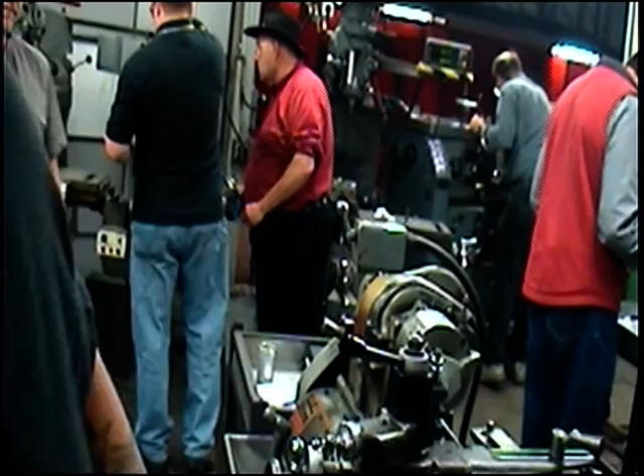This is where I'm at right now. And if you can see, this is the chuck. It's sticking out right here.

This is for safety reasons, because if it's not sticking out past the end of this chuck, and you go in and you're cutting and you hit one of these, it's called crashing the machine. You'll break this whole piece and everything.

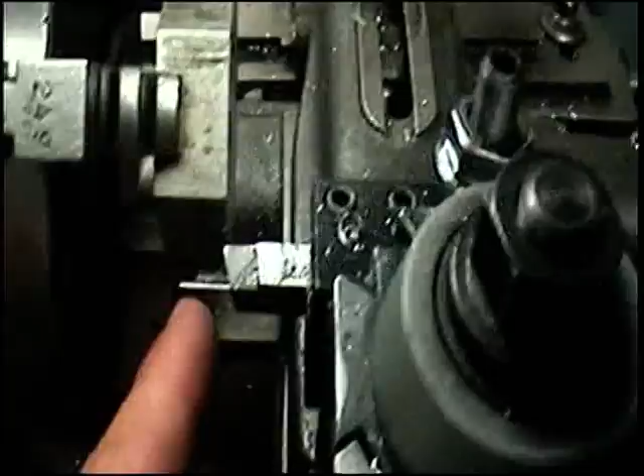So you want this sticking out, so when you're cutting, no matter what you do, you only cut the material. You don't cut into the headstock or the chuck or your bit, and all that breaks, and you got problems.

You have metal flying everywhere. You could probably die or something. You'll get hurt real bad.

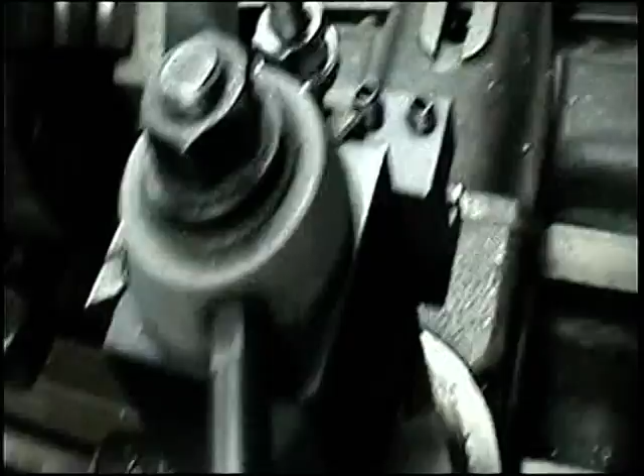So I'm taking off - you see it cleaned it up more. I still got these marks now. I gotta get it all nice, get rid of all this stuff. So I'm gonna go 15, 15, 15 thousandths until it's all like a mirror shine.

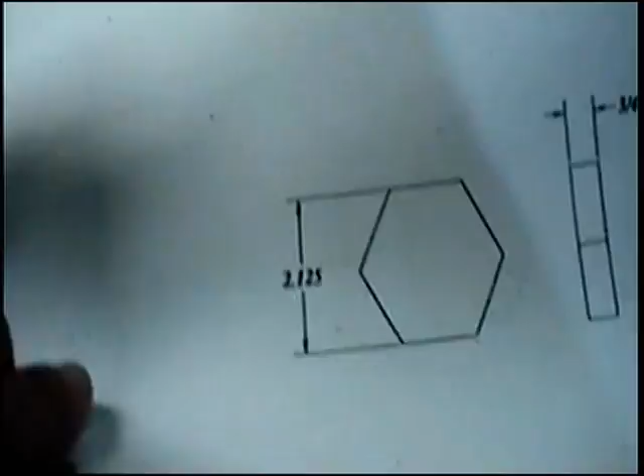And I just got this handout today, I didn't have it earlier. So the first 3 operations: you get your blank piece, file chamfer all 12 edges, the hex part blank, which I did.

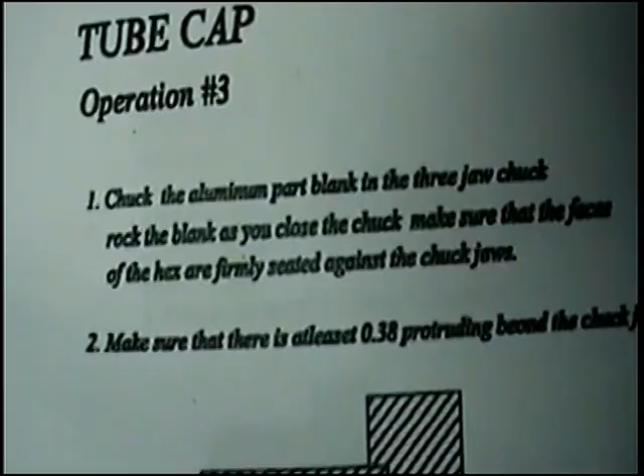I cleaned those up, and chuck the aluminum piece, part blank, in the 3 jaw chuck, blah blah blah - you want it protruding beyond the thing. That's the safety part. And this is where I'm at right now.

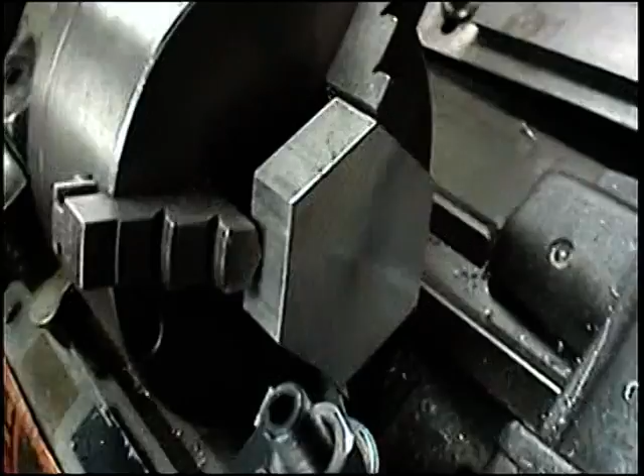So right here, okay, so when you're cutting, you never want to come back when you're trying to clear up this whole face. You never come past the center, because you can knock your piece out of the chuck.

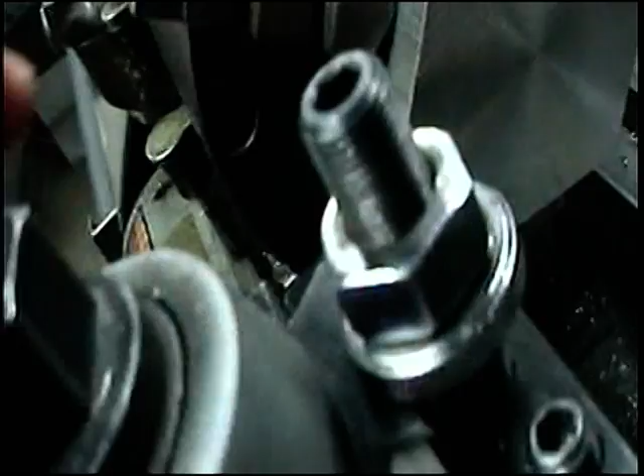And then if you want to know whether your piece is too high or too low - if there's a little tit, like you can feel a lump, then it's too low. The opposite means it's too high. So basically, I can feel like a little nipple right there.

So we already raised it up here, locked it down, and then when you're doing all this stuff, you want to use your brush to make sure all the filings and shavings from the last cut aren't in there, because that can adversely affect where it sits when you set it.

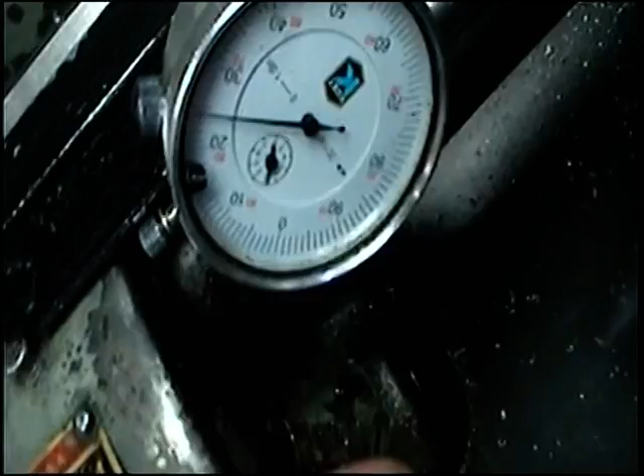So I'm just going to keep coming in 15 thousandths - 23 is my zero right now. I can set the dial at 0 if I want, but basically all you got to do is remember where you're at when you stop and turn off the machine, then come in another 15 thousandths and so on until it's where you want it.

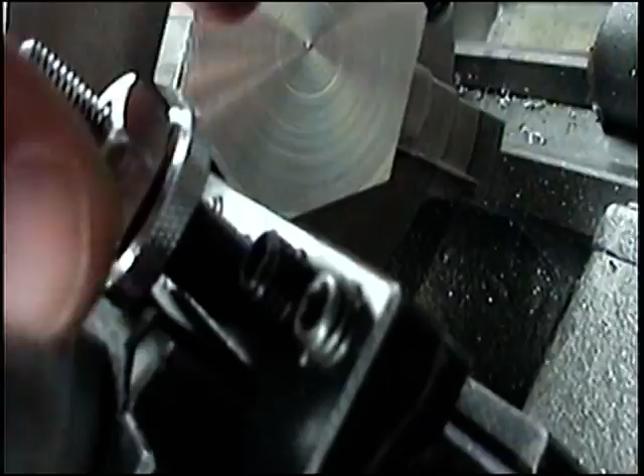Okay, I got rid of all the hack marks, but you can see I got this little tit right here, so my tool is still too low. So I raised it, loosened this, gave it a little turn, brings that up, walk it back down, and come across another time.

So I'm almost done here.

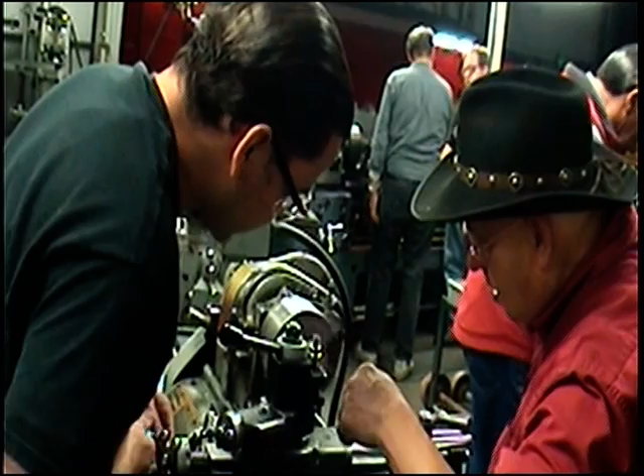So I might as well just replace this.